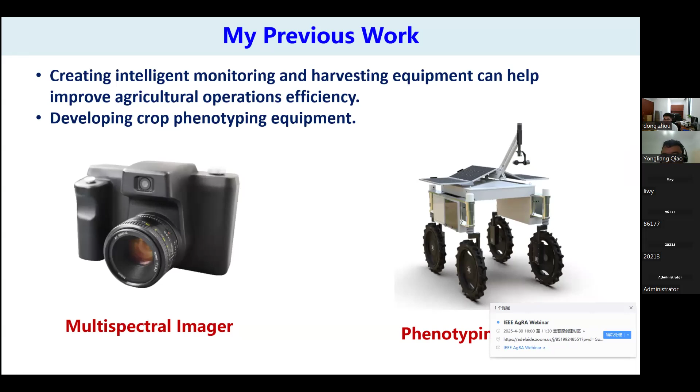My previous work focused on developing crop phenotyping equipment, mainly containing 2 parts: a multispectral imager and a phenotyping robot. There are many major commercial multispectral imagers available now, but they have 2 main limitations in the field of agriculture phenotyping monitoring.

The first is the highly complex optomechanical structure, and the second is the poor real-time image and spectral processing, which is not conducive to the analysis of crop phenotypic parameters.

So in my work I have designed mosaic filters with breakthroughs in snapshot and small FOV imaging technology, and developed an information processing system for online processing of sensor data. Our multispectral imager has been equipped on DJI drones for phenotyping monitoring.

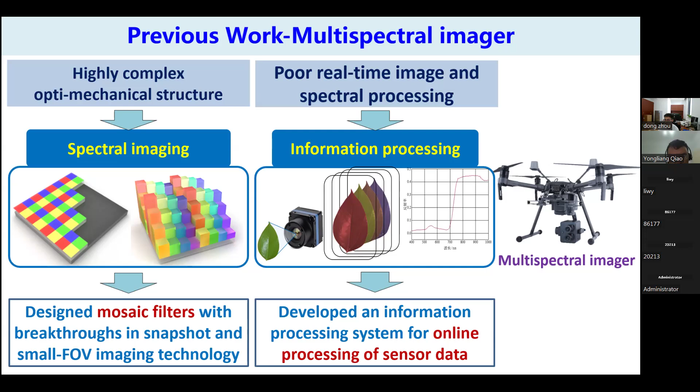However, UAVs are unable to meet the demand for close-range, high-throughput phenotyping monitoring. So I also developed a universal phenotyping robot for paddy and dry fields.

The robot structure is shown on the left image. It mainly consists of 5 parts. The first is an adjustable mobile chassis, whose track width can adjust from 1,400 to 1,600 millimeters. It also has a motion control unit, and a robotic arm is equipped on the robot.

The robotic arm can be equipped with many sensors such as LiDAR and a multispectral imager, and an information processing unit is used to realize the parameter calculating. Solar panels and batteries provide the power supply to ensure the robot has a working time of 4 hours.

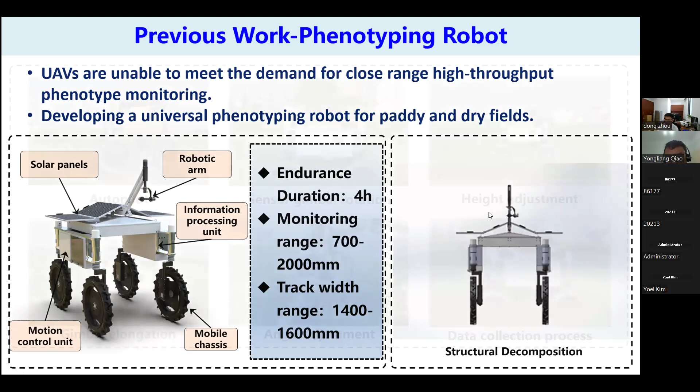The right part is the structural decomposition of the robot. This is a video of the robot operating. It can autopilot and perform sensor gimbal rotation, with height adjustment, gimbal elongation, angle adjustment, and data collection process.

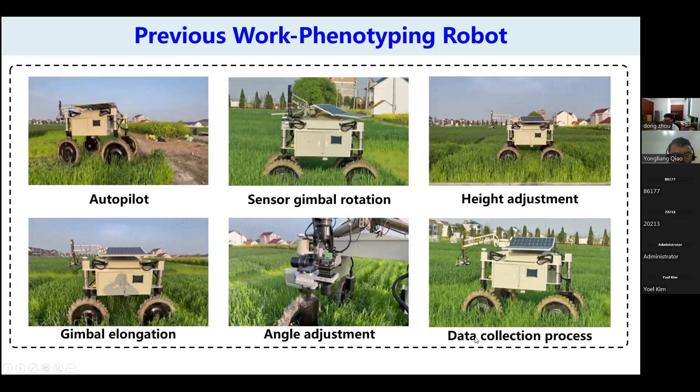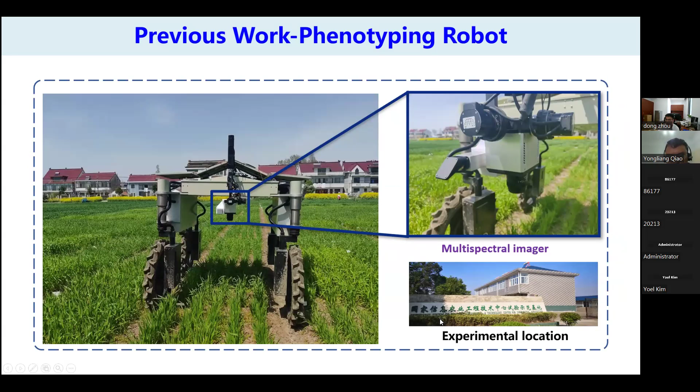We have combined our multispectral imager with the phenotyping robot and conducted experiments in Rugao, Jiangsu. The two videos show the phenotyping robot with the multispectral imager in rice production areas and rice breeding areas, with the advantages of adjustable wheelbase and autonomous navigation. We can see the robot can walk easily on the paddy land.

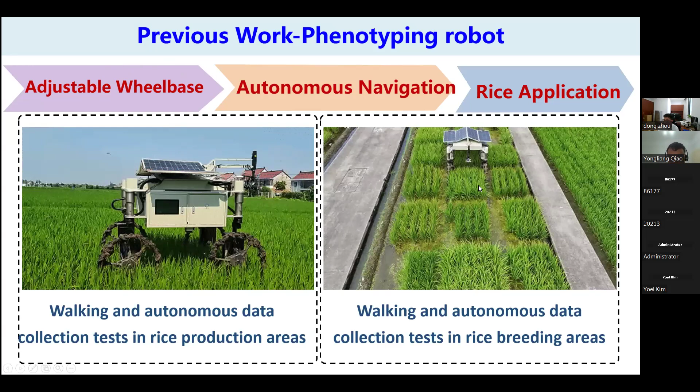As you can see, my previous work mainly focused on non-contact sensing. However, some parameters must be monitored through close contact methods to ensure accuracy, such as SPAD-502 to evaluate the relative content of chlorophyll in leaves, and PAM-2500 to evaluate fluorescence parameters, especially wearable sensors monitoring the surface temperature and humidity of the blades.

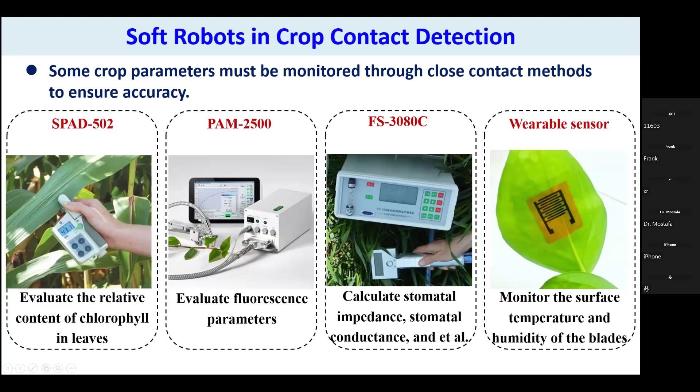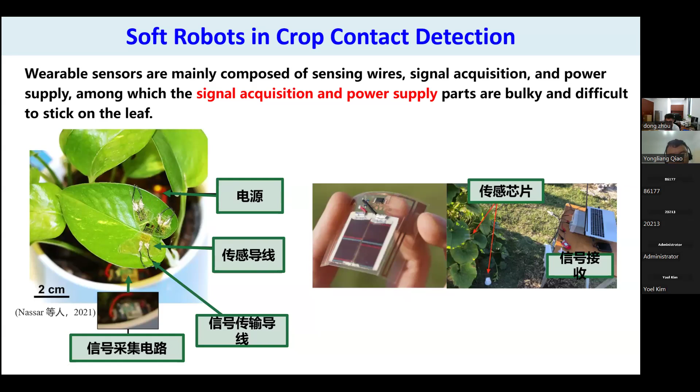Wearable sensors are emerging crop physical parameter monitoring devices, which have received a lot of attention for their non-destructive and good comparability. Wearable sensors are mainly composed of sensing wires, signal acquisition, and power supply, among which the signal acquisition and power supply units are bulky and cannot stick on the leaf, so they cannot realize reliable attachment to the leaf.

So another method is integrating wearable sensors into biomimetic robotic arms, allowing integration of power and signal transmission modules onto the robotic arm and achieving a similar wearable contact effect.

The rigid robotics represented by 6-degree-of-freedom robotic arms have been widely used in industrial products such as in cars and planes. But rigid robotic arms are prone to damaging crops during contact operations. For example, if we use a rigid arm to grip an apple, the rigid part will damage the apple, affecting monitoring accuracy and reducing crop yields.

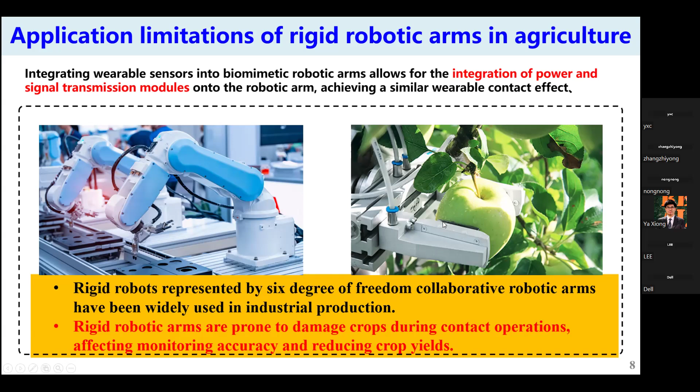So I have designed a soft robotic arm to solve this problem.

The robotic arms are made from highly flexible silicone, as we can see on the left, and it can generally be divided into symmetrical upper and lower parts. The upper part is a cavity that can expand after inflation, and the lower part is a solid structure with constant length. So when the upper part is under high pressure, it will expand and cause the overall deformation for the soft arm.

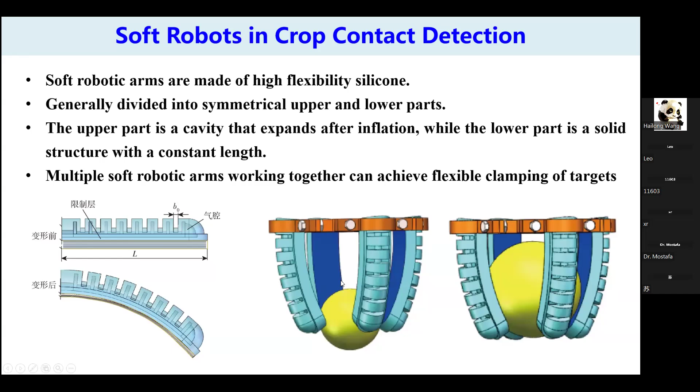Multiple soft robotic arms working together can achieve flexible clamping for targets, especially for fruits, eggs, and other crops. But the traditional soft robotic arm relies on overall bending deformation clamping. As we can see, one robotic arm or three robotic arms clamping are suitable for grabbing three-dimensional objects, and it was difficult to achieve tight clamping for crop leaves.

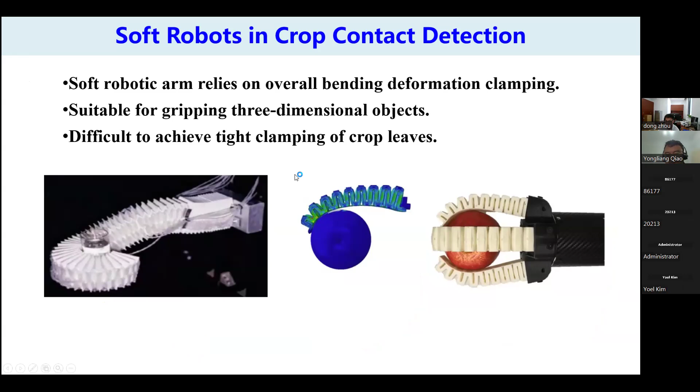So I have designed a new type of robotic arm. The front end of the robotic arm is controllable. During the clamping process, it can achieve both flat clamping and curved clamping, and therefore we can place wearable sensors like this at the front end of the robotic arm to test the leaves and the fruits.

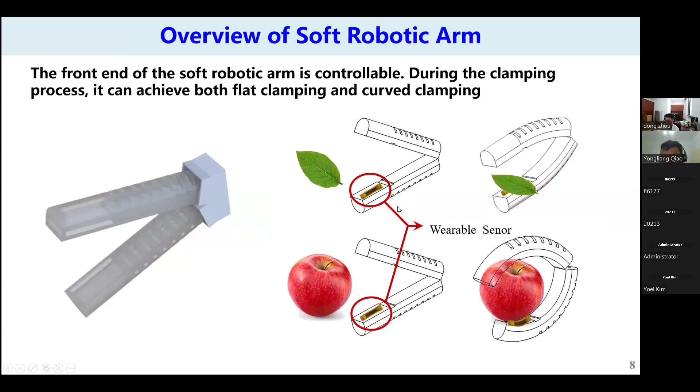I call the control method the variable stiffness control method, and this is the sectional view of the robotic arm. We can divide it into three parts. The upper part is what we call the deformation part. It mainly includes two cavities. The first cavity is a long cavity, cavity 1, and a short cavity, cavity 2.

The intermediate part is a solid part which will restrict the deformation, and the lower part, which we call the variable stiffness part, has cavity 3 to control the stiffness of the robotic arm.

When we use the robotic arm for fruit clamping, cavity 1 and cavity 2 will be at high pressure, and cavity 3 will be at low pressure, so that the high pressure on the upper part will cause the overall deformation of the robot. As cavity 3 is at lower pressure, it will have the same stiffness as the silicone, so the robot arm will have high overall bending.

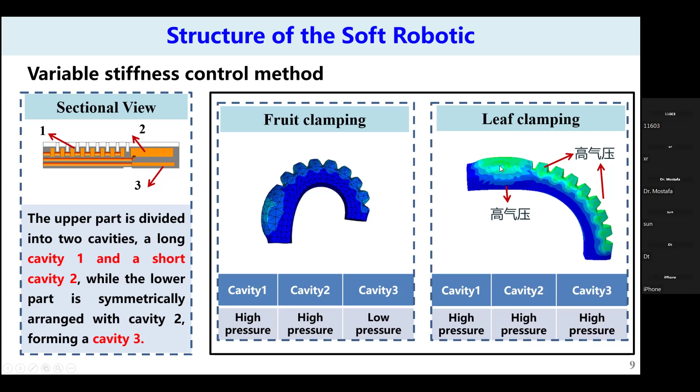The soft fingers will bend and deform towards one side when loaded with air pressure, and the bending deformation state of soft fingers at different bending angles can be calculated.

By establishing a coordinate system with endpoints O1 and O2 as the origin, the x1 and y1 coordinates of the second joint endpoint O2, and the x2 and y2 coordinates of the fingertip endpoint O3, can be calculated from the tips.

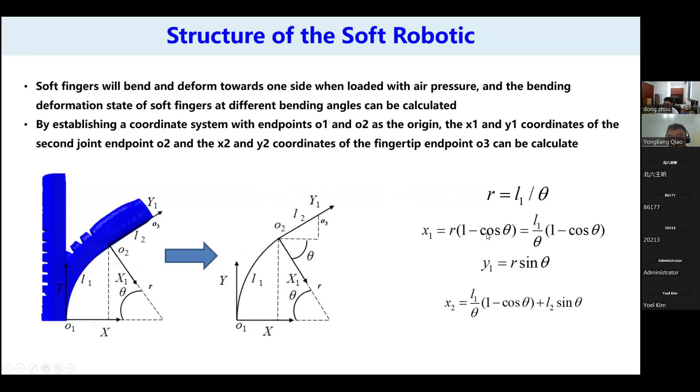In order to determine the optimal structural parameters, we simulated the robotic arm, and through the simulation, determined the parameters of the deformation layer, intermediate layer, and variable stiffness layer to achieve the desired deformation effect.

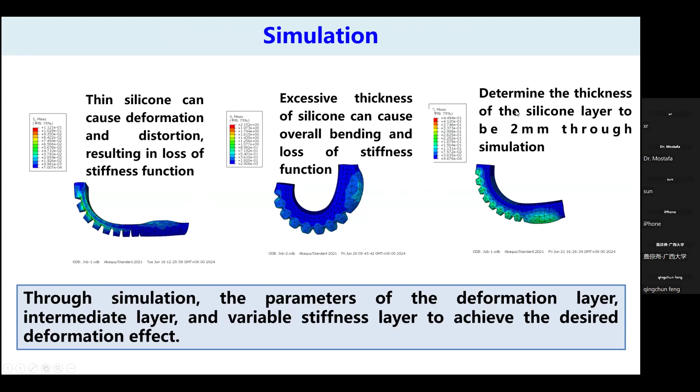As we can see, if the silicone is too thin, it will cause deformation and distortion, resulting in loss of stiffness function. And if the thickness of the silicone is excessive, it will cause overall bending and loss of stiffness function. So we determined the thickness of the silicone layer to be 2 millimeters through simulation.

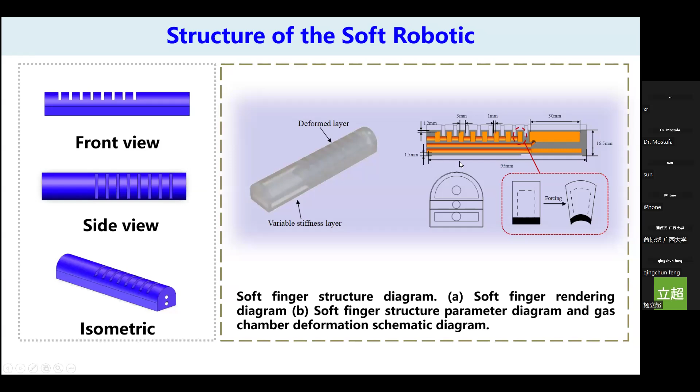To prepare the soft robotic arm, we use a distributed step molding method involving molding the deformation layer, intermediate layer, and variable stiffness layer of the soft robotic arm separately, and then bonding them together with silicone gel. For the deformation layer, we first use a 3D printer to make the mold and cast the silicone.

To make the deformation layer, with similar operations, we can use the 3D printer to print the intermediate layer mold and the variable stiffness layer mold.

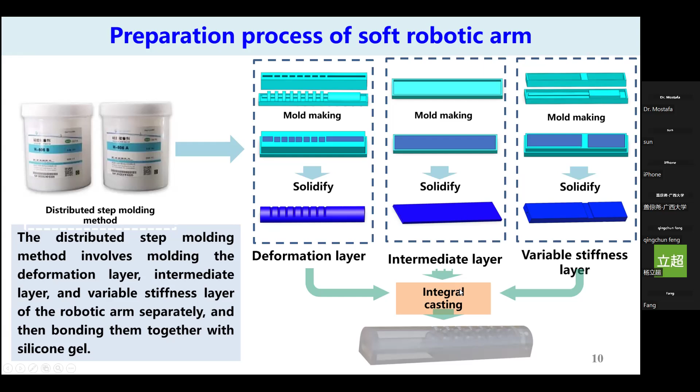After casting the deformation layer, the intermediate layer, and the variable stiffness layer, we use silicone to bond them with integral casting. The left shows the control system of the robotic arm, and the prototype of the soft finger driver and its control system.

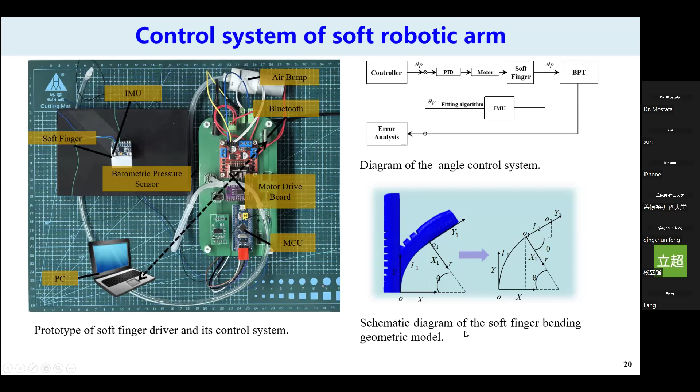The soft finger angle control uses a PID to control mainly two pressures of the soft finger. The deformation part with cavity 1 and cavity 2 share the same pressure, while cavity 3 has the other pressure. So there are two PID control systems, and this picture shows the diagram of the soft finger bending geometry model.

This is the control software of the soft robotic arm, programmed using PyCharm. It has 5 functions, including setting serial communication parameters, setting the deformation pressure value, setting the variable stiffness pressure value, displaying real-time pressure curves, and data buffer to save the data.

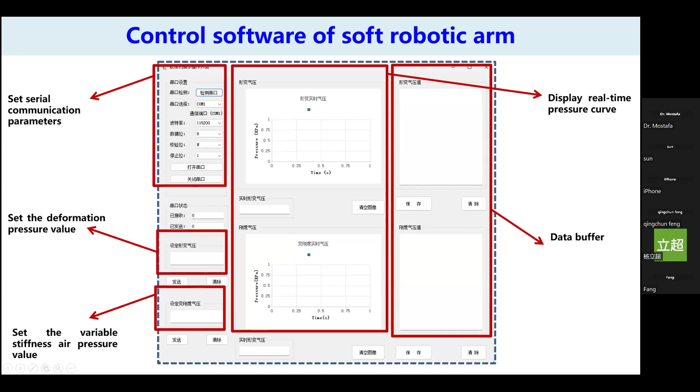This is the video for leaf clamping. As we can see, it mainly involves 3 steps: prepare, clamp, and release. The deformation layer with cavity 1 and cavity 2 are inflated with high pressure, while the stiff layer cavity 3 is maintained at high pressure, the same as cavity 2. This causes the soft finger to deform and tightly clamp the leaves.

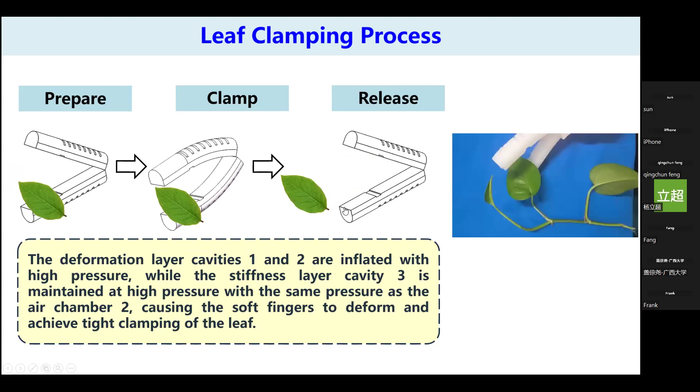Because cavity 2 and cavity 3 have the same pressure, it will have high stiffness and will not deform too much, staying in a plane structure for the leaf clamping.

And for fruit clamping, as we can see, we use a rigid robot and a soft robotic arm to clamp a fruit.

The deformation layer of cavity 1 and cavity 2 are inflated with high pressure, while the stiff layer, cavity 3, maintains low pressure and the same stiffness as the soft finger itself.

Because cavity 3 maintains a low pressure, it will have the same low stiffness as the soft finger itself, which causes the soft finger and the soft arm to deform as a whole and achieve the action of clamping large 3-dimensional objects.

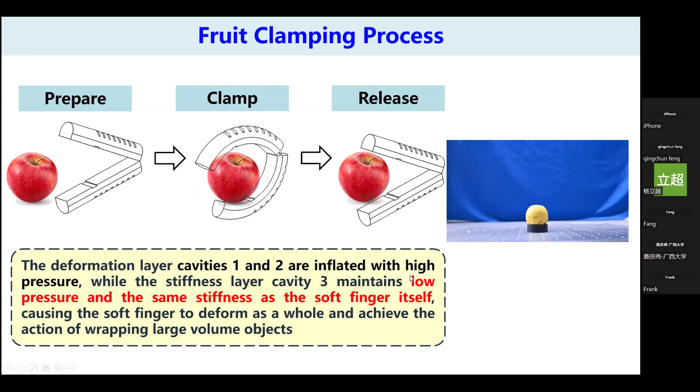My other work is to make wearable sensors, which can monitor early stress signals in crops.

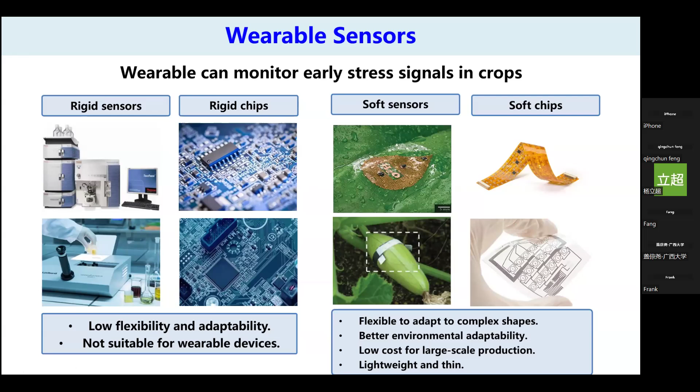As we all know, metal resistance has a linear variation with temperature. So if we get the resistance of the metal, we can also calculate the temperature from the metal resistance.

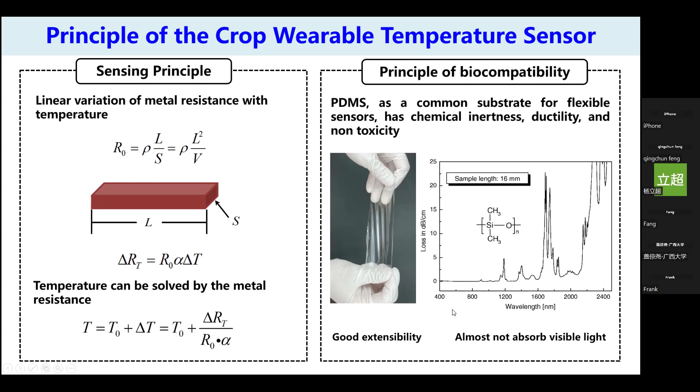We use PDMS as the common substrate for the flexible sensor, because PDMS has excellent extensibility and almost does not absorb visible light.

To make the wearable temperature sensor, we first made a coating mask. The coating mask is cut and processed by a laser engraving machine, and the mask material is acrylic board.

And we use the coating machine to coat the film. Under vacuum, the boiling point of the metal decreases significantly, and when heated, it becomes gaseous and condenses on the substrate that is not covered by the mask, forming a copper film, as shown in this picture.

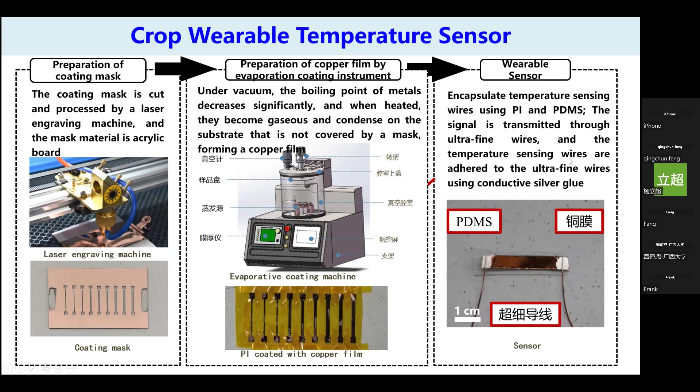We encapsulate the temperature sensing wires using PI and PDMS, the signal is transmitted through ultrafine wires, and the temperature sensing wires are adhered to the ultrafine wires using conductive silver glue.

The temperature wearable sensor is attached to the plant leaves using van der Waals forces provided by the PDMS substrate, and temperature monitoring is achieved through the responsive resistance-temperature curve.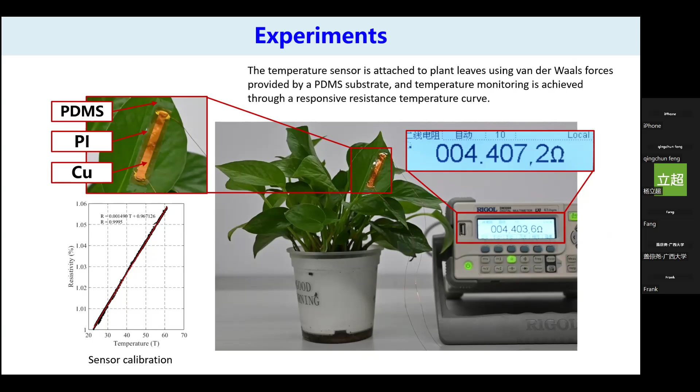I have also made a crop wearable humidity sensor. Its principle is that laser-induced graphene, LIG, is mainly based on the photothermal effect and chemical reduction of laser radiation on the surface of a plastic substrate.

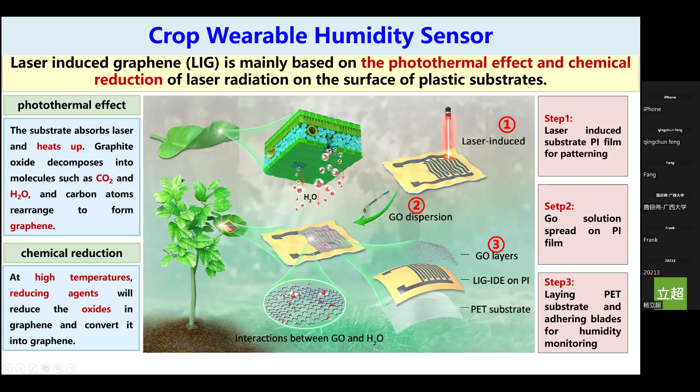We can use 3 steps to make the wearable sensor. First, laser-induce the substrate PI film for patterning, then spread the solution on the PI film, and at last lay the PET substrate and adhere it in place for humidity monitoring. This picture shows the materials and machines used to make the wearable humidity sensor.

We first choose the flexible substrate materials and use equipment such as a laser engraving machine and coating machine and other machines to make the sensor, then process it using the process technology to prepare the flexible sensor, and at last we can establish a system integration.

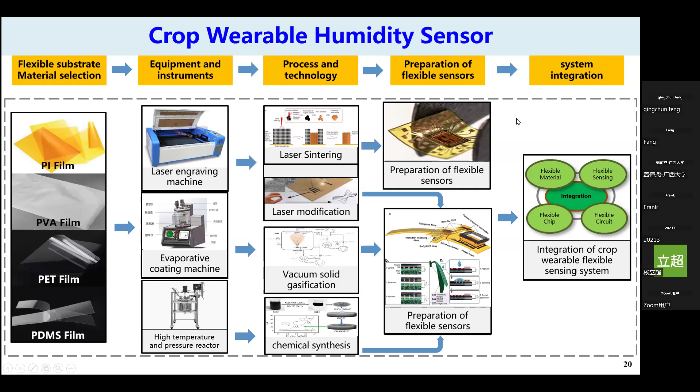This is the picture of the humidity sensor. Because this is a new work, we just tested it in the room.

The design direction is the finger spacing, and the laser-induced power spacing is 200 micrometers to 500 micrometers. We use laser-induced power of 3.5 watt to 5 watt. We tested it indoors, where the humidity is about 20%, and the laser speed is 200 millimeters per second. As the finger spacing increases...

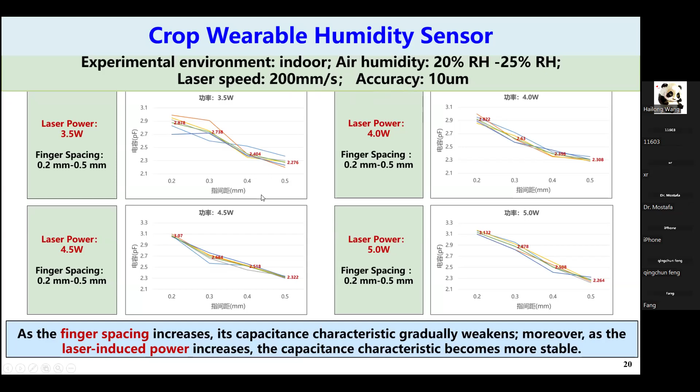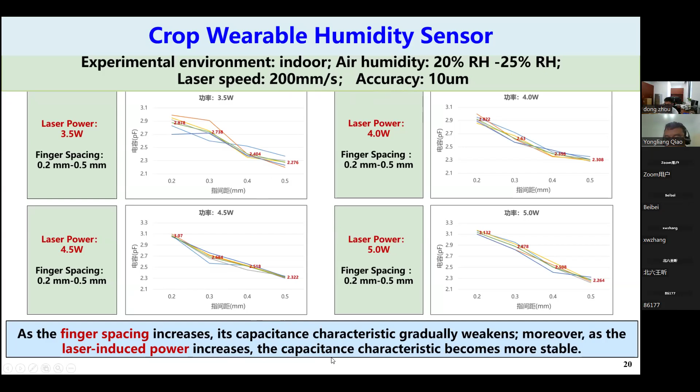Its characteristic gradually weakens. Moreover, as the laser-induced power increases, the capacitance characteristics become more stable.

I'm very happy to collaborate with more wearable sensor teams, and welcome to Nanjing Agricultural University. This was all my introduction. Thank you.

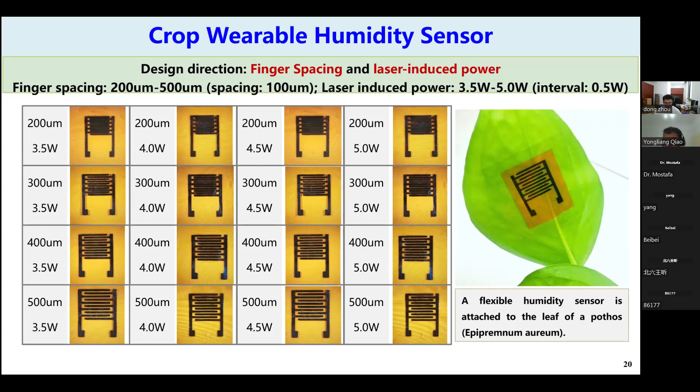And the second question's answer is: I want to calculate parameters for different crops, and this needs large-scale work to acquire data from many crops, establish a database, and create a more useful and common calculating method. That's my answer. Thank you.